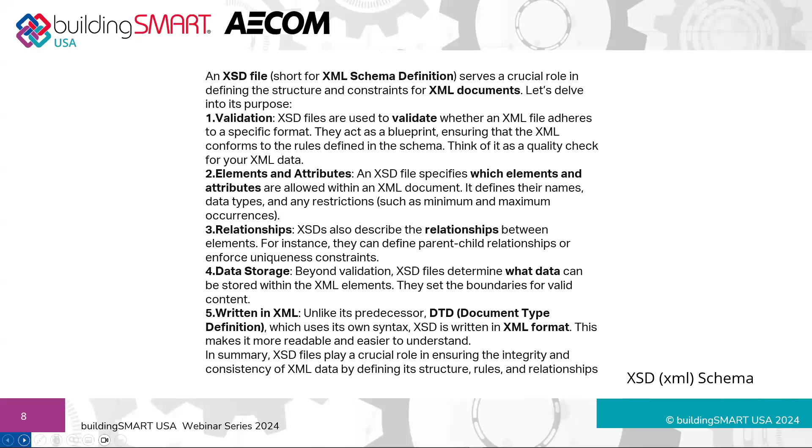And they validate the XML. So while you're writing XML, if you're not using XSD files, I highly recommend it. It's a nice container, a nice hierarchy to build out openBIM strategies with what you're doing.

An XML file, not going to get deep into it, but it has a purpose and a definition. It can be compared with HTML, but they have 2 completely different functions, which I'm not going to go into, but XML is a data-rich description language, okay? And HTML is predefined and is limited with markup symbols. And then there's some common uses I list on the screen for XML files: RSS and Atom feeds, Microsoft .NET configurations, small databases, UI layouts, and Android applications.

So here's an example of a schema in XML that's validated and put into our XSD format. This started with the original schema that came from the software and then was developed. To tell everybody to do this, you have to have a programming background or an understanding of it, but you can use samples that come from the software that you use to build on these classes and definitions that you're checking and looking for. The vendors have worked very closely with buildingSMART to develop this information, and it's very key to have an understanding of these as you develop and enhance your own schemas we're working through.

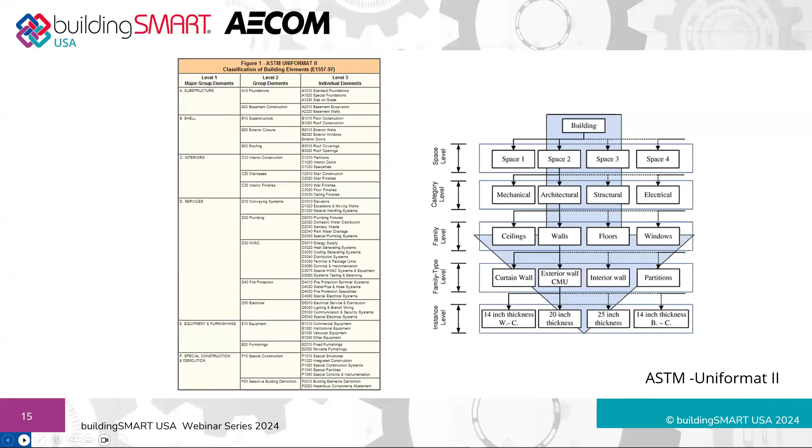What I'm showing here is related to buildings, but we have the Uniformat table, which is broken down into very short form. It goes out 5 levels, but depending on how deep you want to go with how you're developing what you're doing, it ties over into what's shown on the right, where you have space, category, family type, and instance level. These vary by software, but the format and the schema can then be broken down even further into OmniClass, which is another established schema that we work into our XML documents.

So Uniformat is a container. OmniClass becomes the element level definitions of how we want to define what we're doing based off of the various tables that you see here, which can all be downloaded in CSV format and then translated into XML schemas.

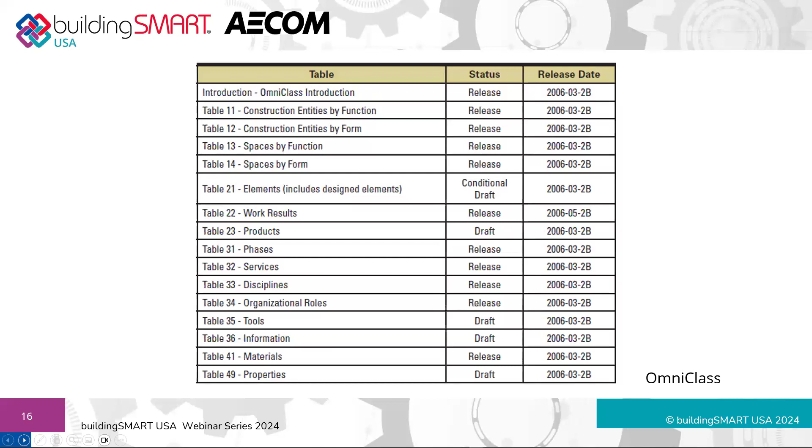This is where the two come together. So when we tie OmniClass and Uniformat 2 together to container to element level files, it's a great schema to work with regard to XML and how we're developing what we're doing. So I encourage everyone to look into these schemas if you haven't, because they're very powerful to contain information with result of openBIM and the interoperability between software platforms.

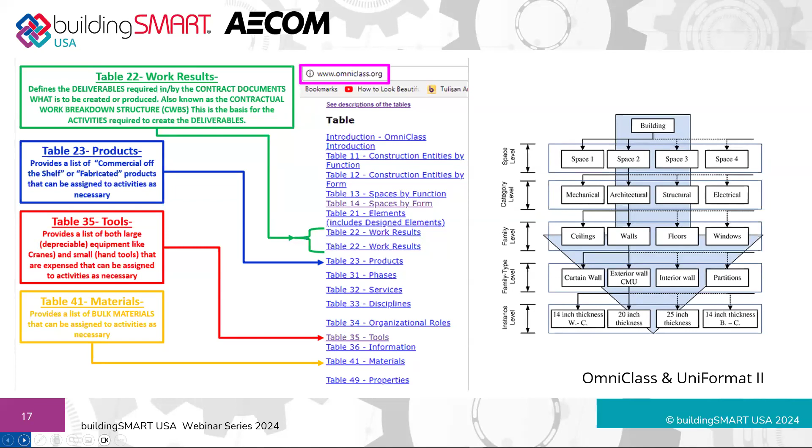And then obviously we have the LOD forum, LOD spectrum here, where LOD is required, and those building check files come in very key here when you're talking about LOD and validating your models throughout the delivery process, whether it's existing conditions or new designs based on openBIM schemas.

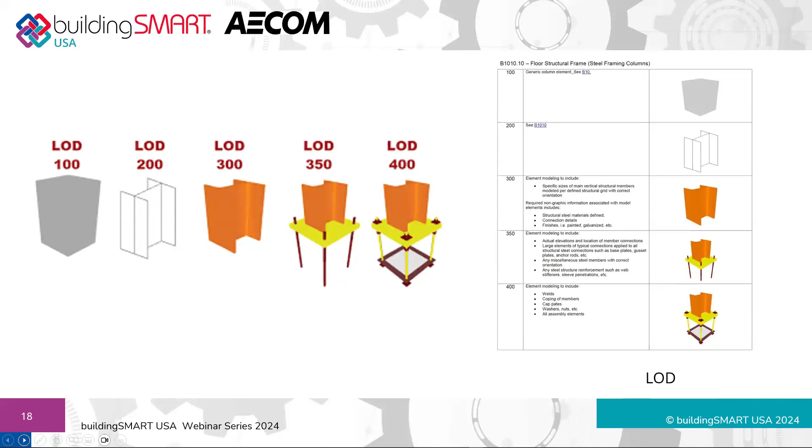So here at AECOM, I've developed 8 touch points, or what I call 8 pillars of BIM to asset management. And the reason why it matters is asset management is the end goal, right? That's what we're trying to achieve. We have conceptualization in two forms, raster and vector. Those are the traditional two-dimensional files that can be data rich if you develop the right schemas and the Psets for those objects.

But then we really start to cook whenever we go to 3D or the spatial forms, which then tie to the fourth dimension, which is implementation or time and schedule, and then the 5D, 6D, 7D, and 8D. And one of the things that I want to stress is schemas can also represent risks because of tools like Power BI and the emergence of AI. Risk can be analyzed through various theories or algorithms through the uses of openBIM if you're creative and thoughtful.

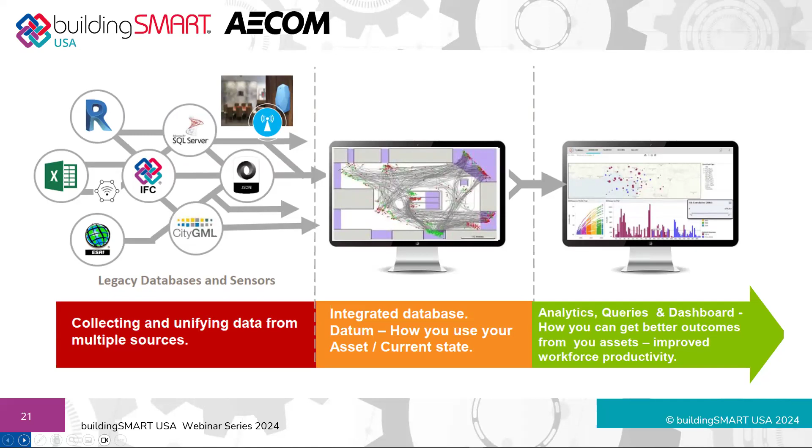All of the items that I've listed are things that we typically include in our models so that that data and information translates through an openBIM forum. So what we have is called a data lake. And what we do is we take and collect unifying data from multiple sources. We integrate it into a database, and you see IFC is the core of that. And then we go into analytics, queries, and dashboards, how we can get better outcome from the digital assets that we have.

So the benefits of openBIM at work. openBIM allows for interoperability between disparate software platforms. It is agnostic. So software, many of them, hundreds of them, can consume the amounts of data based on open APIs and view the attributes or the elements of the model. Ownership or chain of custody is important because the ownership of the elements are maintained throughout the life cycle, and each iteration of an openBIM model locks down features and their parameters and attributes.

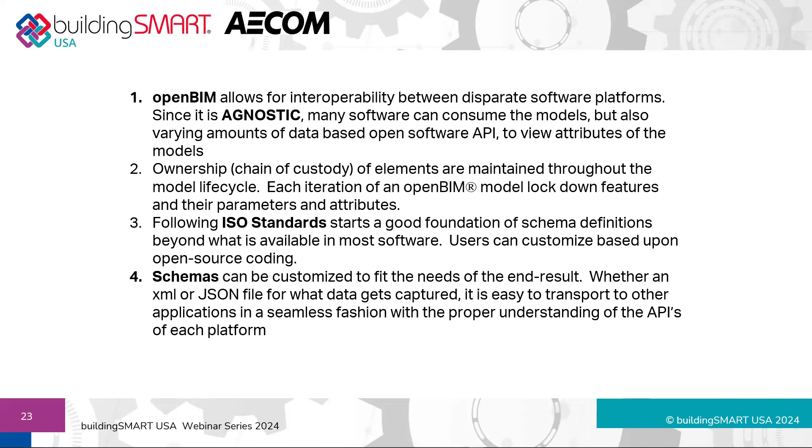They follow ISO standards. I cannot stress that enough. We don't have time today to go into all the linking ISO standards, but there are about 24 that are connected together that go into creating a very successful openBIM. And then the schemas can be customized to fit the needs of the end result, which I talked about can be XML or JSON.

So proposed enhancements. What I found are 5. openBIM is still in the infancy stage for global adoption. More agencies need to develop an understanding of the power of openBIM and the business use cases. This is important. Terrain modeling requires enhancements. Large terrain models do not produce correctly because of the size and the amount of triangles to make the surface. openBIM schemas need to take asset management into account in greater detail. ISO standards define this, but as we're moving towards digital twins, asset management has to be accounted for in those schemas.

Standards need to be implemented across agencies that use black box software. We encounter this with various numbers of clients. They have their own software developments or requirements that are not open schemas. They need to adopt and develop open schemas to share and utilize that information. And then finally, we need vendors to develop a stronger schema for 4.2 enhancements for civil works. I've been working for quite a long time to get civil works into our IFC schemas for the models that we do in transportation.

So I'm going to go real quick and switch my screen. I'm going to stop sharing here and switch over to Solibri, and then I will close out and then turn it over to Connor. I hope everyone can see the screen. I can see it on my end that it's being shared. Looking good.

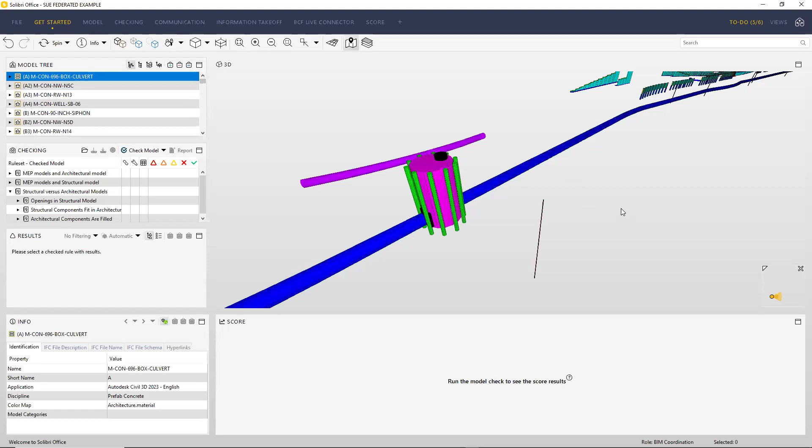This is Solibri Office. Used to be thought of as Solibri Model Checker. But the great thing about this is what we can actually do inside of Solibri and how we work with openBIM models and IFC schemas. This model comprises several hundred models. It's a large transportation project, and it focuses on SUE elements inside the project. So the great thing here is I can check my identifications.

My IFC file descriptions, which are very extensive, and then the implementation level for the schemas, the file name, the software that was used to derive it, the time and the date, other information, the file schema that was used, and then any hyperlinks to objects that I would click on.

The benefits when I talked about the expanded schemas is when I select objects inside of this model, the P-sets or the additional IFC schema information that I wrote in XML comes up and identifies all of the relevant properties that can be used or exchanged, mostly going downstream towards asset management softwares. We can get quantification, which I think Connor's going to talk about.

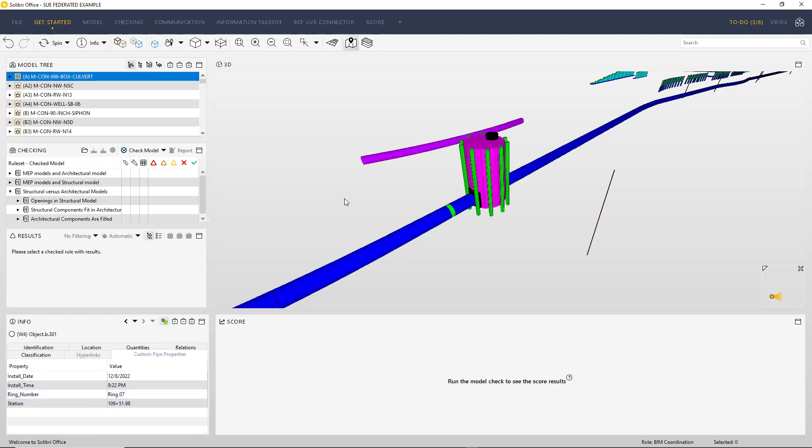We have relationships. We can also go into custom properties. For this instance, we had information from the field on install date, install time, the number of the rings. This is a dewatering tunnel schema that was set up. And then the station identification and IDs. So it's a very powerful tool.

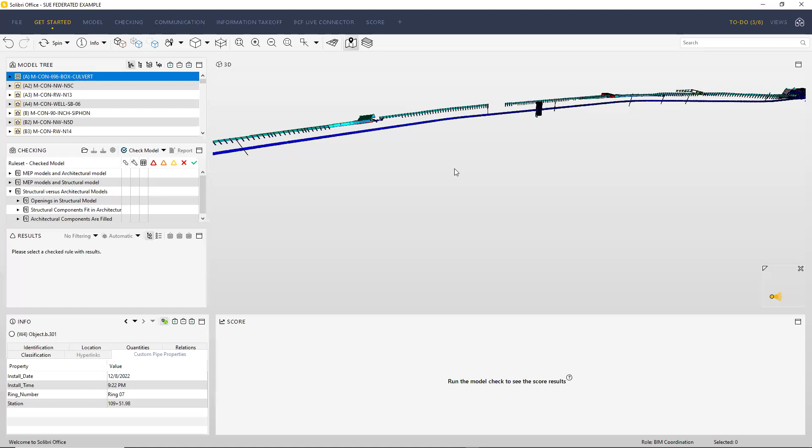It's a very integrated model, and there are other checking tools out there on the market, but you can see that there's great opportunity if you set these schemas up and build these models properly, that you can check them with rule sets, and those are also P-set definitions or BCF file checks, which you can connect here, import your own information, or create them. And there's a lot that you can do with openBIM and the information that's available.

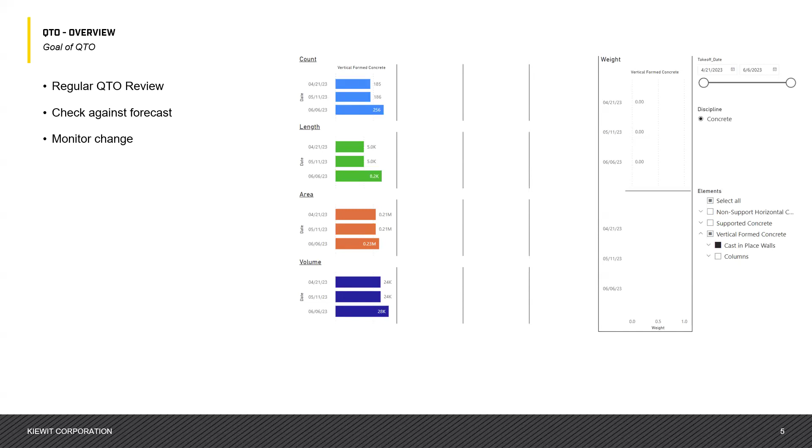They can also be checked back against forecast. If we have a forecast amount, we're expecting so many cubic yards of concrete in our walls, we can actually watch our models as they build and see those quantities approach a forecasted amount or pass a forecasted amount, so that we can start asking questions. So that is really our goal, to make sure that we're monitoring how change is happening, so that there's no surprises when new packages are delivered.

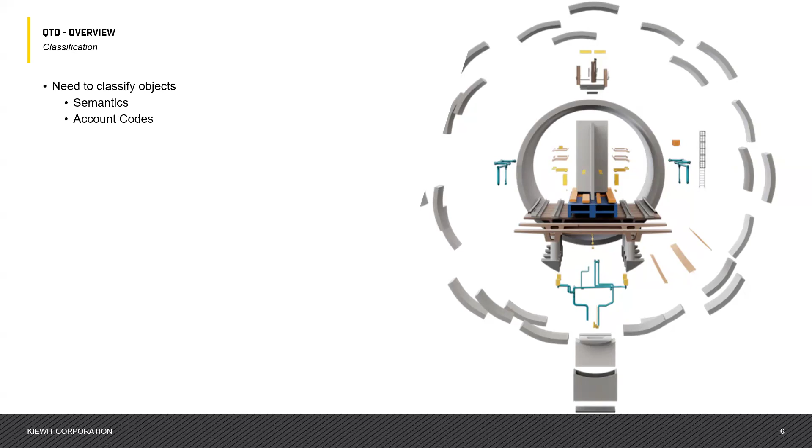Now, a big part of quantity takeoff is the classification. In order to actually get those numbers out, we need to understand what objects are and how they're classified. And for us in particular, it's our work breakdown structure codes that we're trying to apply to those objects. And there's always that fun game of trying to marry up what is it named versus what is its account code. And I'll talk a little bit about that method of how we try and make those two things work together.

Now, there's also a unique problem in QTO, which is that there is a one-to-many problem. If I have one object, it would be nice if I was only trying to get one thing. I have a concrete wall. I just want to know how much concrete's in it. But that's not really the case. As a contractor, we go a little more in depth into our estimates and want to know more about our quantities.

So our one object, like a concrete wall, not only do we want to know how much concrete is being poured, but we also want to know how much dry finish has to be applied. We also want to know how many joints there are. We also want to know the square footage of bulkheads and formwork. And all of that is actually a whole bunch of account codes that get applied to just one object. So it's not always as easy as I have one object and I just get quantities out and it does what I need it to. And I'll talk a little bit about how we approach that problem.

And this is something that I talked about, going back to a forecast or something that we can compare it to. An important part of that is actually trying to just come up with a primary quantity. I mentioned the one-to-many problem. A lot of times we'll choose just one primary quantity that we are tracking for forecast. And that's more of a database issue, because a lot of times these things get named similar or different things, and that makes it hard to compare across all of the different objects that you look at. But if you have, for each object, a variable that's called like primary quantity, that becomes something that is able to be compared easily.

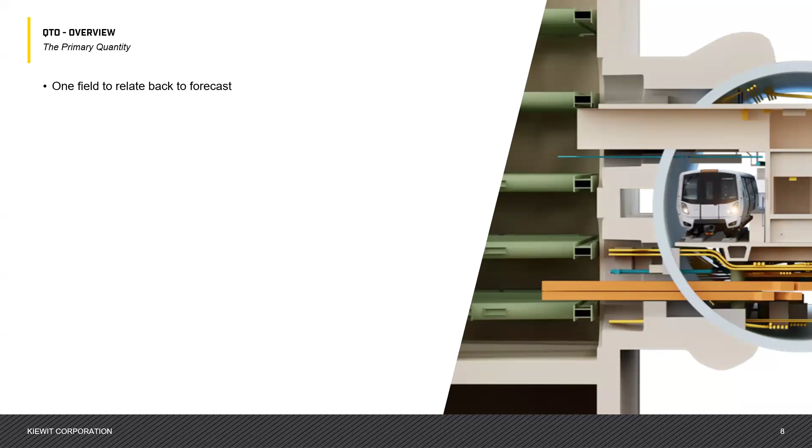And that's really just for reporting purposes. That's something I like to throw in there that we're doing. Not only are we getting all that data and trying to figure it out, but we like to identify these primary quantities for comparison purposes. So that's the overview. Now, the current method in how we're approaching this is, I talked about classification, and that's really the first step.

Currently, what we are typically doing is, after our models are created, we're actually having to start to apply all of these account codes. And that's just how it's been currently. I would very much like to say that we're getting all those account codes applied properly while we are building our models. But the truth is, a lot of the projects get started up and are rolling before we're actually able to get in there and talk about this process. So what we're left with most of the time is models that after the fact we have to apply it to. And that is problematic. It's actually pretty tough to apply those account codes.

What we're doing is we're taking our current models, we're bringing them into a platform, Navisworks. We're actually tearing the database out of that and applying our account codes to those objects in that database. And that allows us to partially automate it. So there's some things that we can see about objects where we're able to say, this thing gets this account code, and have it read through and do that. But I'll say that a lot of it is actually manual. You have to go through and find those objects and try and figure out exactly what the account code is that you want to apply.

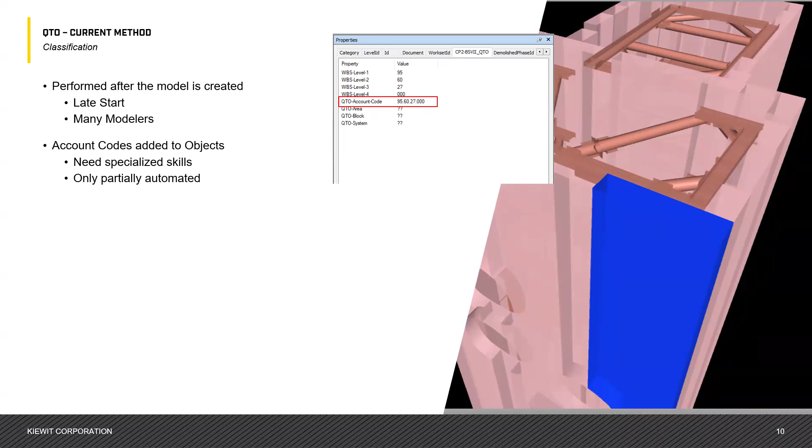Now, once objects are classified, we're able to do quantity takeoffs. And right now, the current product that we're using is Navisworks to do that. There's lots of products out there that you may be able to use. We've leaned towards this because it helps us solve our one-to-many issue. In Navisworks, you are able to create a takeoff on objects and assign that object resources.

So I can take off one wall, and not only will it take off the wall, but it will take off the formwork, and it'll take off the joint prep, and it'll take off the dry finish, all of those other pieces of that wall and associate it back with that object. And that saves us a lot of time instead of having to take one item and take it off 8-10 times. I take it off once and it does 10 takeoffs for me.

But in this process, again, it's mostly manual. When we do our takeoff, we create search sets. I select an account code. I find the corresponding account code within my quantification workbook, and then I hit takeoff. But that is click here, and then hit takeoff. And every time it changes, someone has to come back through and do those clicks for every single account code.

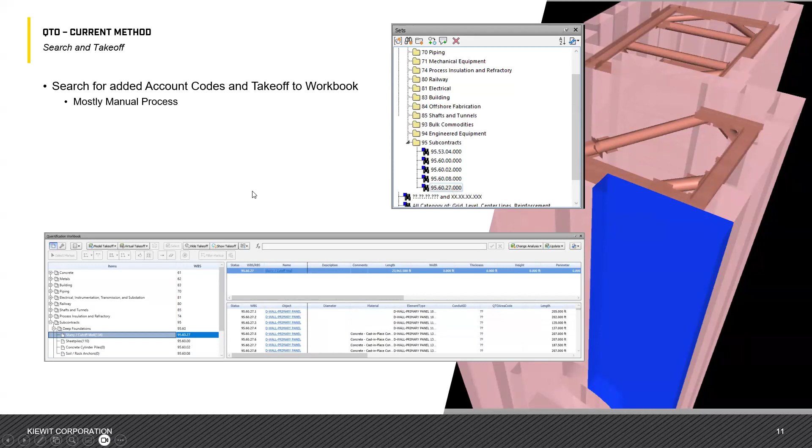Now, once that quantity takeoff has been created, what we do is we export that out to Excel so that we can attach that data into some Power BI dashboards that give people the readouts that they need to track those changes in quantities. Now, I'd love to say that that was perfect too, but even that is an issue.

And there's something really important to note there, which is when you work in Navisworks, it has a great quantity takeoff tool, but it actually starts to take the data out of the objects and put them into a workbook. So the quantity takeoff workbook is an entire separate data set from the actual modeled objects themselves. And that is one problem.

The other problem is upon export, I mentioned that it has the regular takeoff, but it also has those resources, those other objects like dry finish and erect and strip forms, or you can see over here, fab forms, erect and strip blockouts. The problem being, if you look over here, the account code 6103.10.002 is the same on all of those.

Now our resources actually have another digit in there. After that 002, there should be like a .01 or .02. And for whatever reason on export, it doesn't get applied. It only gives it the WBS of the overarching object. So that's problematic. So there's lots of issues we have in these exports.

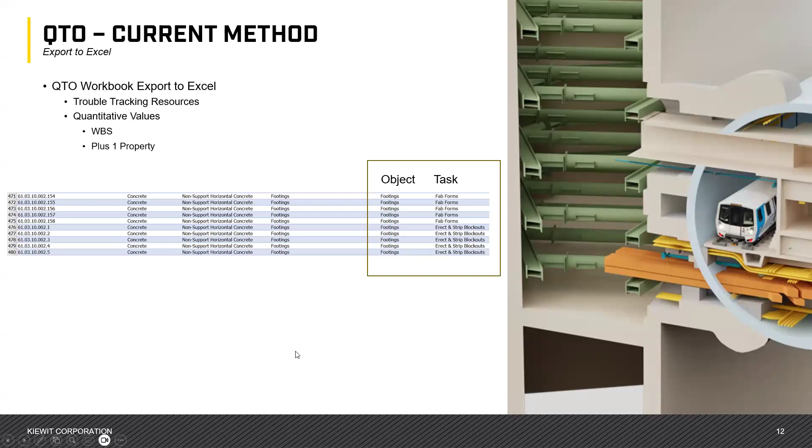And if we're doing something like pipes, and I want to try and differentiate my pipes by their material and by their size, that's not data that I can pull over. I have to choose one or the other. These are all issues that we're having right now, and this is very specific to this tool. But there's other ways that we think that this can be enhanced and will be solved when we start to use more of an openBIM method.

So internally at Kiewit, we are working on our own software tool that would be for Kiewit only, and it's going to be very much based in openBIM methods and IFC. And it's something that we're actively working on now, learning from these issues that we're having with our quantity takeoff tools. We're leaning into what can we do better. So I'm going to take you through what this openBIM method looks like and why this is a little better.

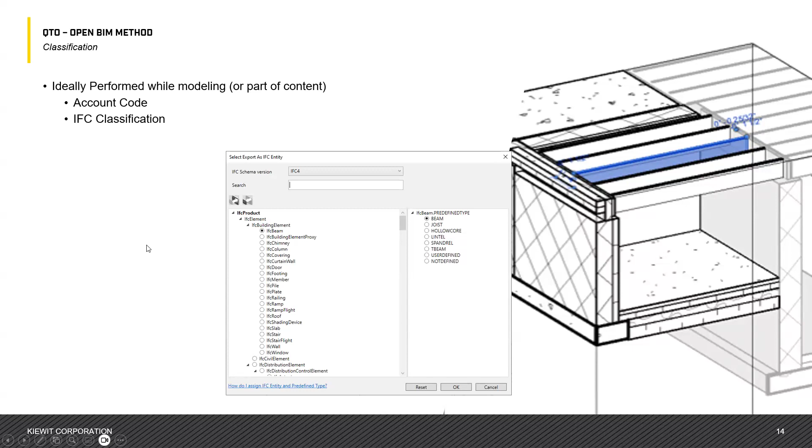Now, ideally, in our future projects, we're actually applying classifications and IFC classifications and our account codes in the models as they're being created. It's not something that we do after the fact. That's something that is built into the softwares, works fairly well, and it's going to carry some of that data in for us, and that would be helpful.

But even if it doesn't, our tools are planning on leveraging a more automated process where we're going to search for account codes and enhance data, which is going to be fully automated. It's not someone looking for something, clicking on it, and then clicking on something else. And this is where openBIM is so important. When you know that something is predictable, you're able to program it. And that's what's great about the IFC data schema.

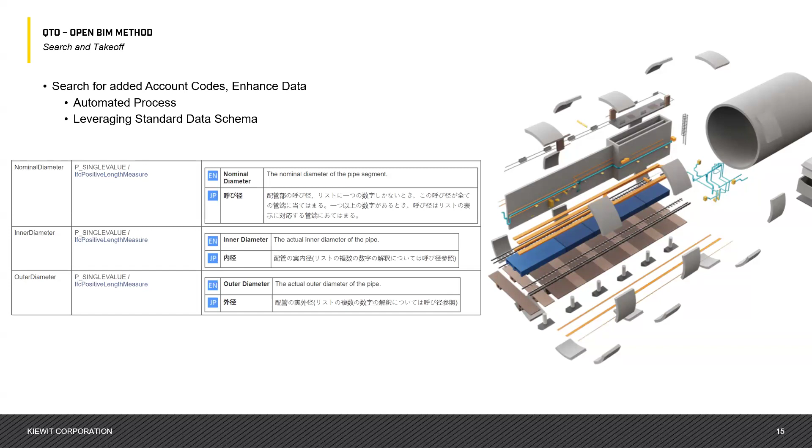And once we're there, once we're just bringing in models, having it automatically apply our account codes, or search by classifications, and add in all the extra data, at that point, all we're doing is taking reports. So the hard part that we're working very hard on currently manually is done programmatically. And then we're just creating reports. And those reports, unlike our current softwares, are actually going to be everything that we need.

And it's going to be on the same object data set, not a separate data set, so that we can actually sort it and group it as desired. If I wanted to look at these objects and change the size and group it by size, that would be something that we could do. Or if I wanted to group it by a certain account code, that would also be something we could do. But it's all in one big data set. And after that, we would either export to Excel, or ideally, we're going to connect it directly to our estimating or quantity takeoff softwares.

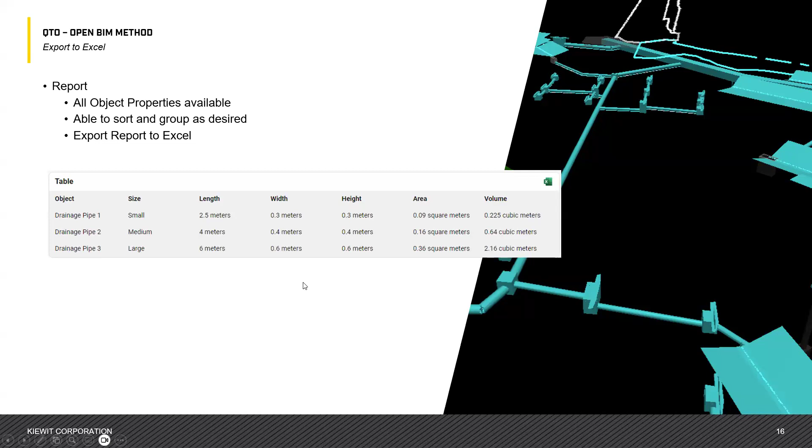So in summary, the advantages from what we're doing today to what we're trying to do with our openBIM QTO process is we're trying to create more automation in the application of account codes, the application of qualitative data. Having that process be automated is much simpler in a world where we know what the data schemas are. And that's why that's so important, because we have projects that are in all kinds of softwares, Bentley and Autodesk and Nemetschek. And if we're able to bring them in and get them all normalized quickly into our QTO process through a known data set using openBIM, that is a huge advantage for us.

The next advantage is that there is more data. I mentioned that we have that issue that when we're going from our models to our takeoff softwares, a lot of time what it's doing is transferring some data to a new data set. And that actually makes things more difficult. The programs think they're making things easier by reducing the data into something else, but that's not the case. So just working in openBIM allows us to work with an entire model-based data set so that we don't get limited on the amount of data that we're working with.